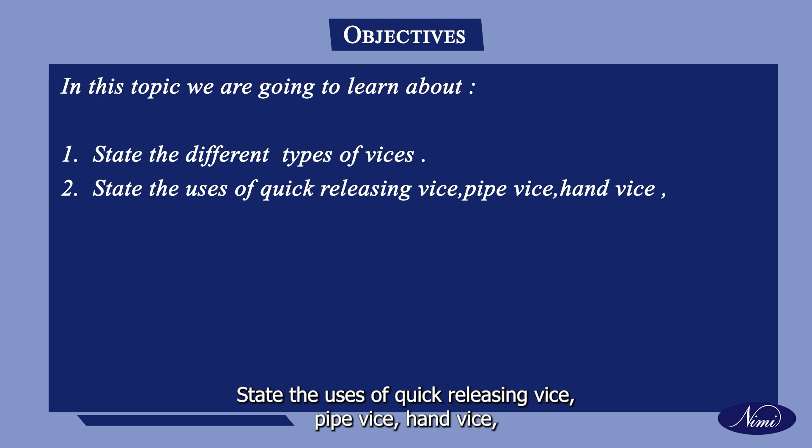Today, we are going to learn about types of vices. In this topic, we will state the different types of vices and their uses: quick releasing vise, pipe vise, hand vise, pin vise, toolmakers vise and leg vise. Let us start with different types of vices.

Introduction. Vices are used for holding the workpieces. They are available in different types. The following are the different types of vices: quick releasing vise, pipe vise, hand vise, pin vise, toolmakers vise and leg vise.

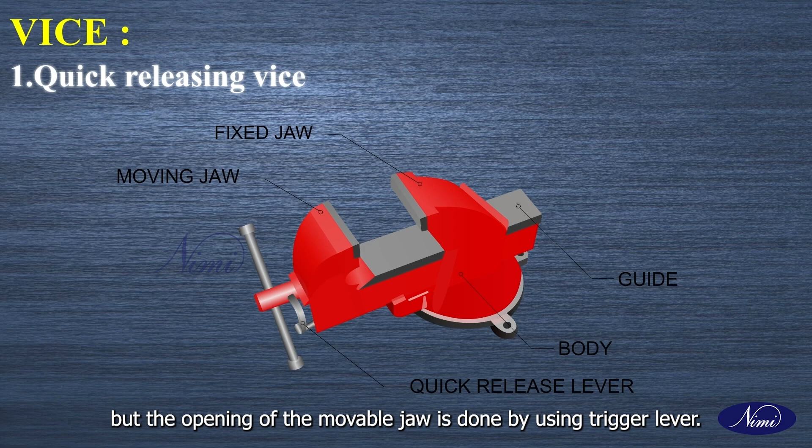Quick releasing vise. A quick releasing vise is similar to an ordinary bench vise, but the opening of the movable jaw is done using a trigger lever. If the trigger at the front of the movable jaw is pressed, the nut disengages the screw and the movable jaw can be set in any desired place quickly.

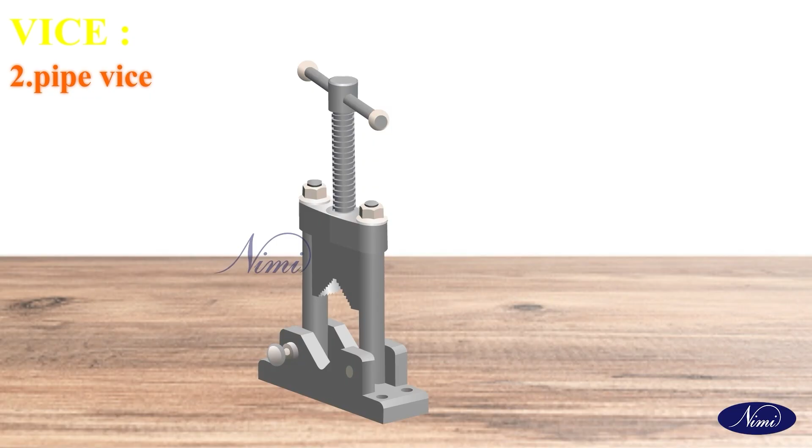Pipe vise. A pipe vise is used for holding round sections of metal, tubes and pipes. In this vise, the screw is vertical and movable. The jaw works vertically. The pipe vise grips the work at 4 points on its surface. The parts of the pipe vise are shown in the figure.

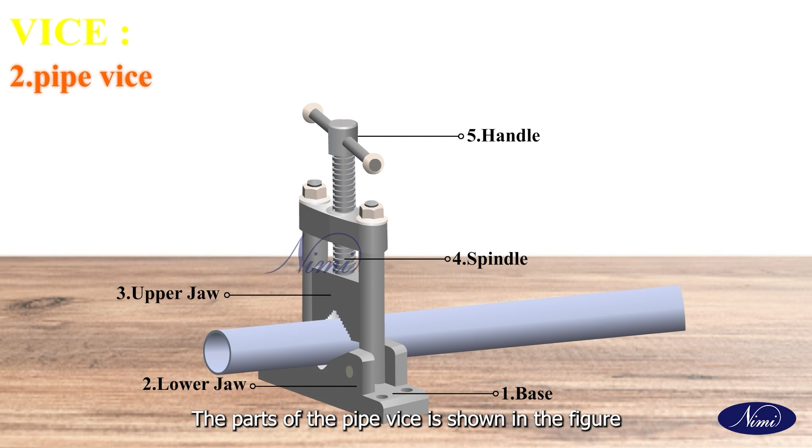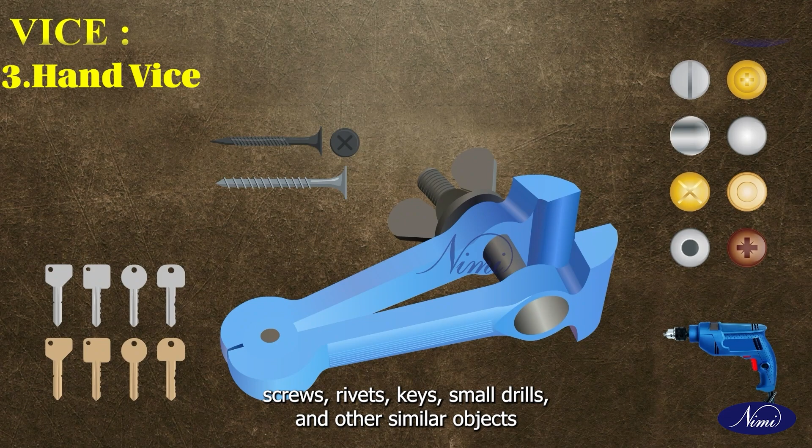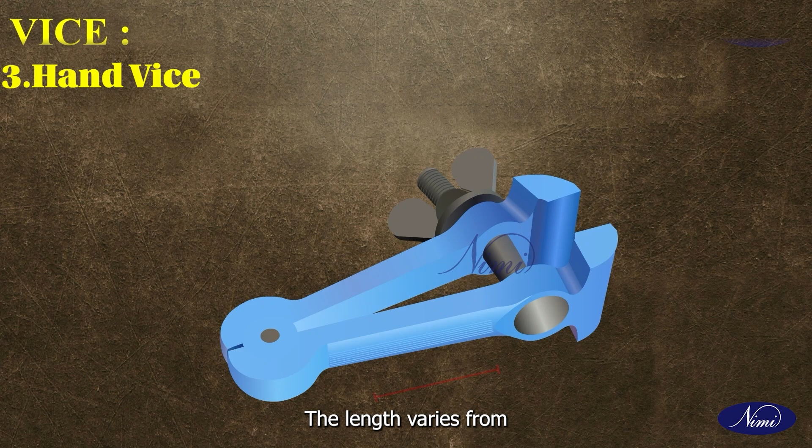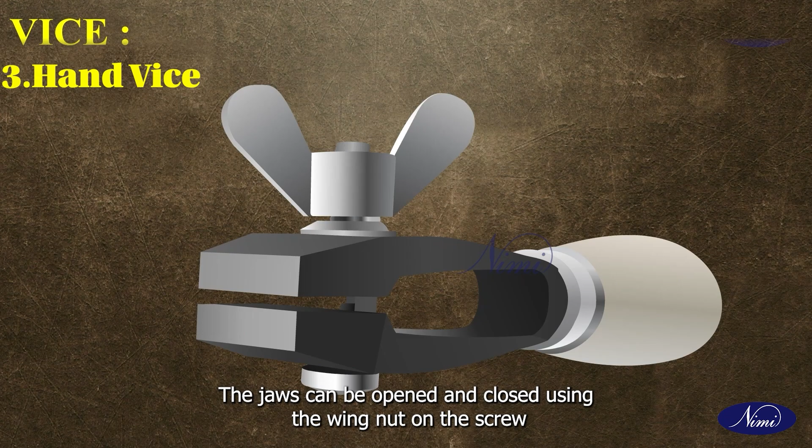Hand vise. Hand vises are used for gripping screws, rivets, keys, small drills and other similar objects which are too small to be held conveniently in the bench vise. A hand vise is made in various shapes and sizes. The length varies from 125 to 150 mm and the jaw width is 40 to 44 mm. The jaws can be opened and closed using the wing nut on the screw that is fastened to one leg and passes through the other leg.

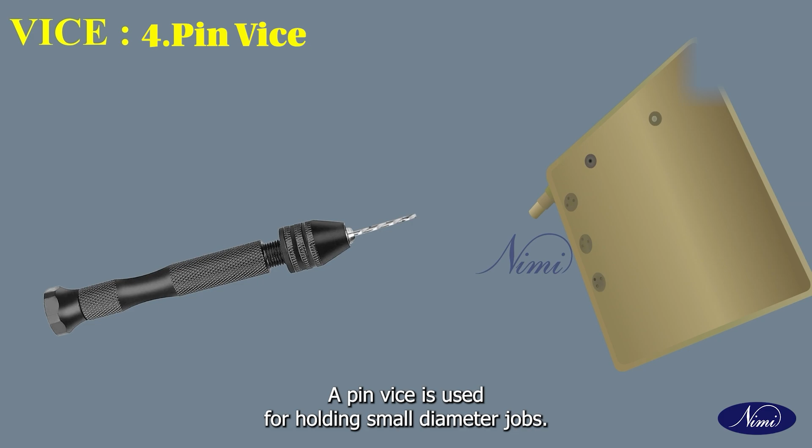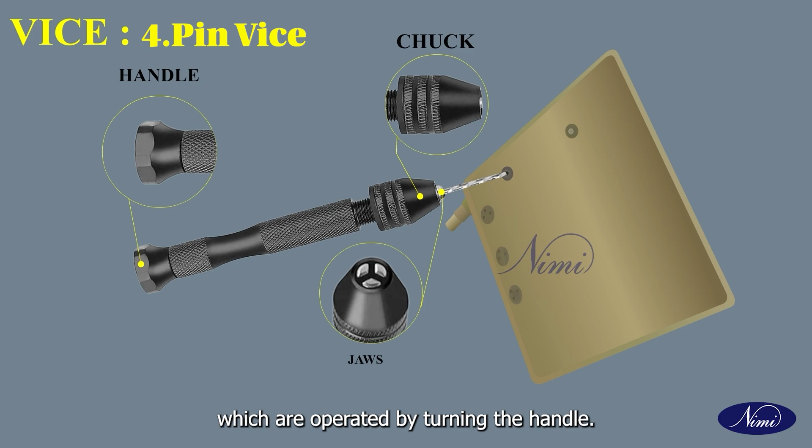Pin vise. A pin vise is used for holding small diameter jobs. It consists of a handle and a small collet chuck at one end. The chuck carries a set of jaws which are operated by turning the handle.

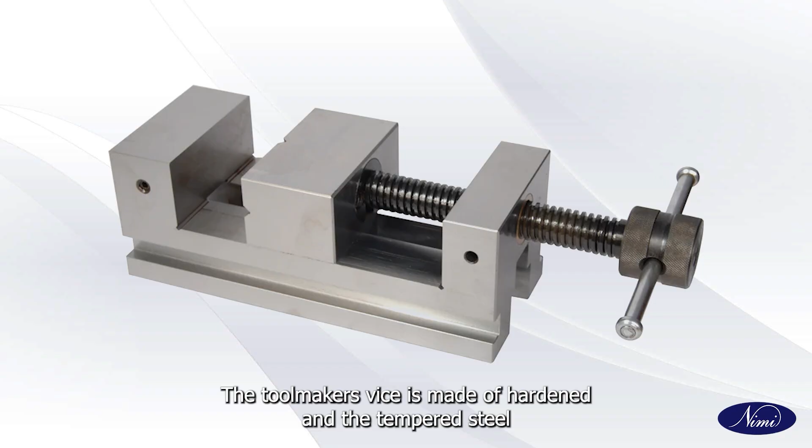Toolmakers vise. Toolmakers vise is used for holding small work which requires filing or drilling and for marking of small jobs on a surface plate. The toolmakers vise is made of hardened and tempered steel. Toolmakers vise is machined accurately.

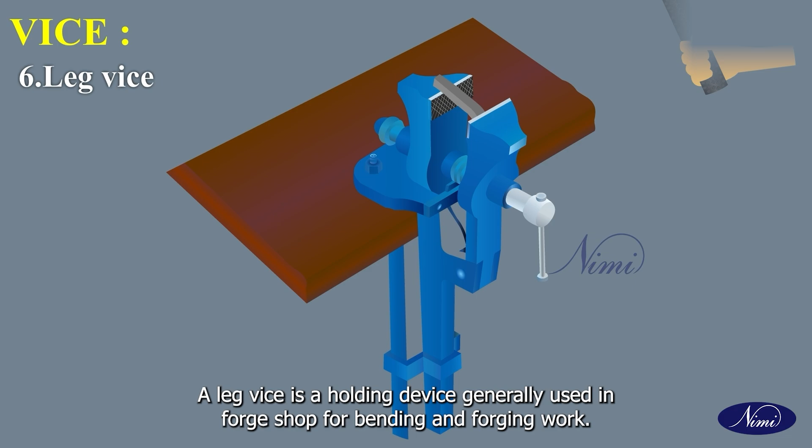Leg vise. Leg vise is a holding device generally used in forge shops for bending and forging work. It is made of wrought iron or cast steel to avoid breakage while hammering.

Main parts of leg vise. The following are the main parts of leg vise: solid jaw, movable jaw, threaded box, spindle, spring, pivot, leg, clamp.

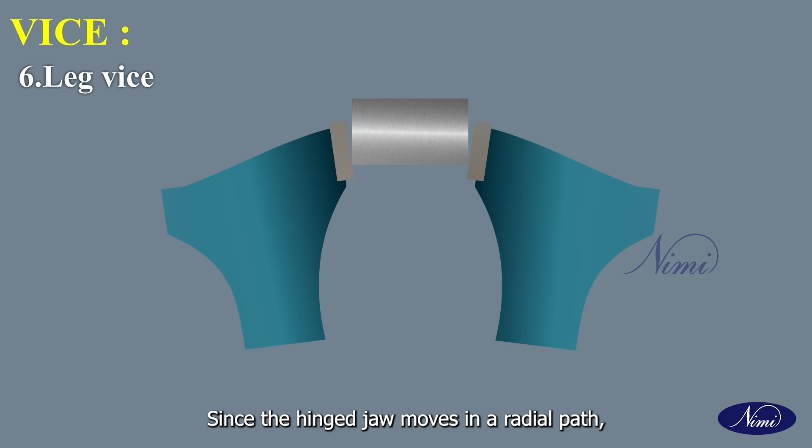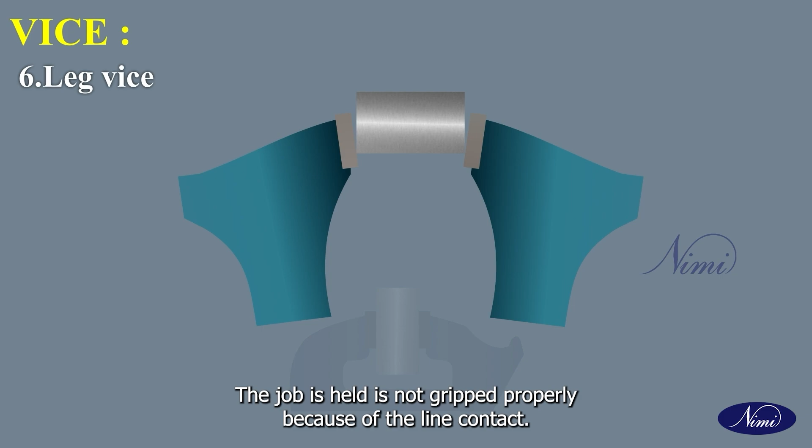Since the hinged jaw moves in a radial path, the job is not gripped properly because of the line contact. Hence, work that can be carried out on a bench vise is not held on the leg vise. Jobs which require hammering only are held on a leg vise.

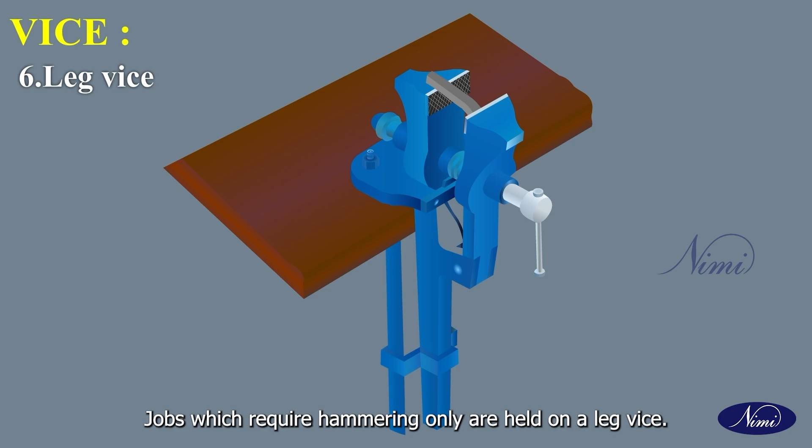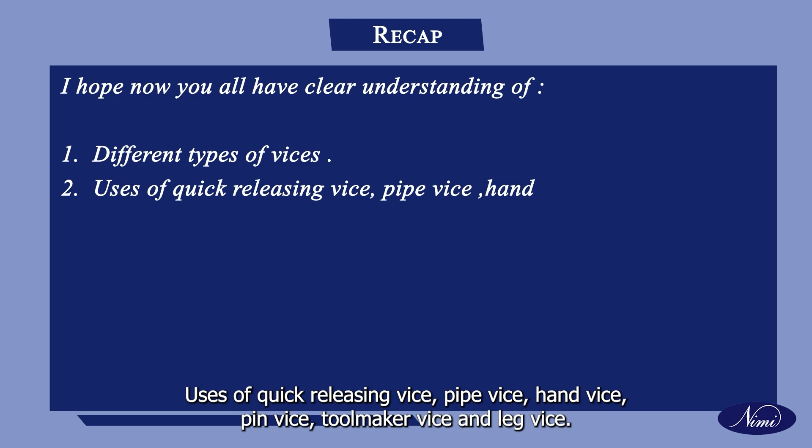I hope now you all have a clear understanding of the different types of vices and uses of quick releasing vise, pipe vise, hand vise, pin vise, toolmakers vise and leg vise.